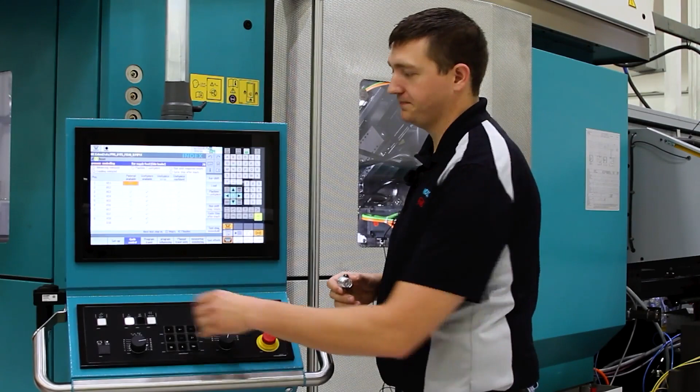So in our first position here, we're going to rough groove the OD of the part, just a 4mm groove tool. This is 6061 aluminum that we're going to be using. So we rough groove the OD, and then we come in with a drill out the ID, just rough it, and then we finish bore the ID of the part with a boring bar.

So in our next position, we're going to finish turn the OD of the part, finish turn the thread major, and then you'll see us come in with a boring bar, and we're going to thread the OD of the part with a boring bar. And then we're going to rough groove the ID of the part with just a 2mm grooving tool.

In our next position coming up here, we're going to use an X and C axis transmit with one of our live tool stations to create some flats. So we can mill any type of contour with this, as long as the tool can come in from the face of the part.

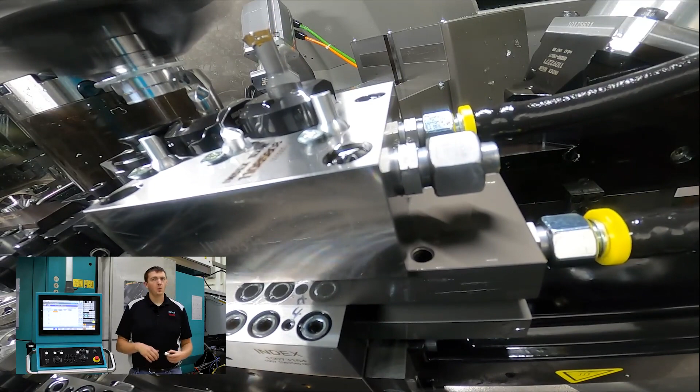We come in, we use our synchron to come in and grab the part, and then we cut off, and then our synchrons allow us to swing to our back working positions. So the benefit of a multi-spindle is we take the parts and move the parts throughout the tools. Instead of like a twin spindle where we move the tools to the part, in this machine we're moving the parts to the tools, which then allows us to separate the amount of time it takes to make a part.

So a part like this, just estimating, would be maybe a minute and a half on a twin spindle machine. On this machine, we're running it right at about 20 seconds or so. So in our last position, we cut off, we bore, we thread. We do have live tool capabilities on the back working.

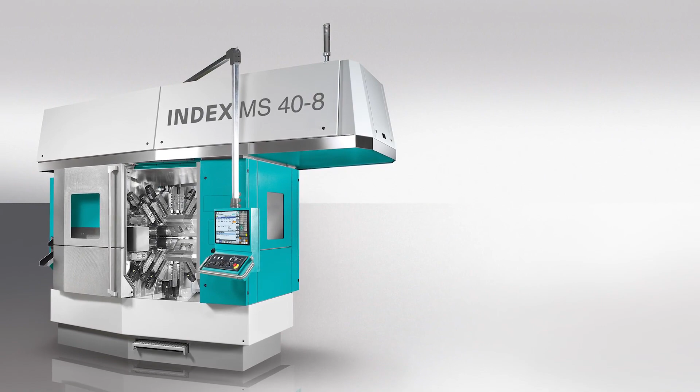You can see the nice wide opening there in the front, easy access. The ideal part for this machine typically is one that can fit in your hand. It's not too long, with a length to diameter ratio of about 3.5 to 1 or less. Decent volumes of lot sizes 5,000 or more are ideal.

If you have live tool work required on your parts, this is a good machine for it. And if you have a part with tight tolerances and lots of callouts, concentricity, it's a part you don't want to be moving from machine to machine. The fact that you can do it in a single setup provides huge benefits.

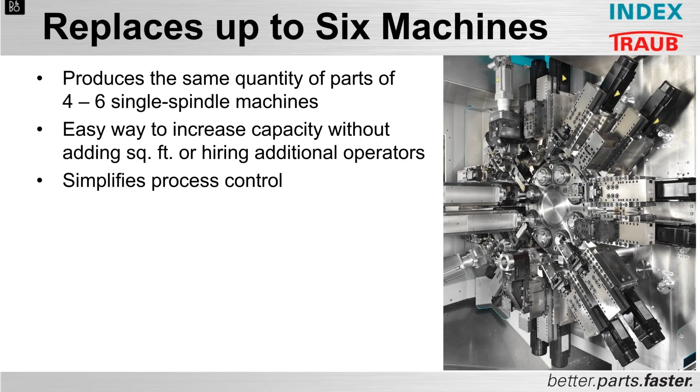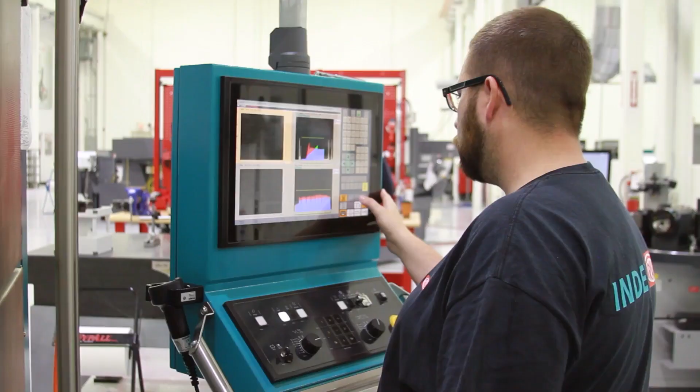The machine is designed to replace up to 6 machines. The capabilities of this machine allow you to make the same production rates typically achieved out of single spindle machines, and quantities of 4 or 6 machines can be matched by a single MS40-8. It's an easy way to increase your capacity without adding square feet to your facility, taking up floor space, or hiring additional operators.

It also simplifies your process control. Very simple to program—in spite of what it looks like, it's actually quite simple. You basically have 8 two-axis machines.

The MS40-8 is also designed, as are most multi-spindles, to give you the lowest cost per part. Dramatic increases in productivity will reduce your per piece shop rate and labor costs by a factor of up to 6 or more. Producing lots on a single machine reduces your costs related to quality, energy, logistics, manpower, programming, and work in process. It's a pretty extensive array of areas where you save a lot of money per part with a multi-spindle.

And despite the higher initial investment, multi-spindles do pay for themselves faster than single spindle machines, usually as a result of just the sheer volume of parts that you're creating off the machine.

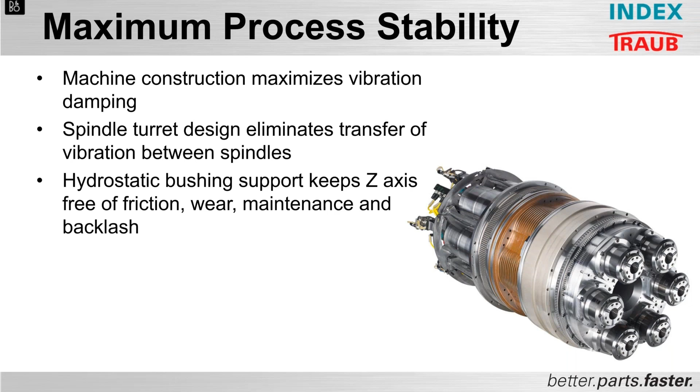Get maximum process stability with the Index multi-spindles. Our machine construction maximizes vibration dampening. We have a spindle turret design that eliminates the transfer of vibration between the spindles. We utilize a 3-piece Hirth coupling, which gives you outstanding accuracy, repeatability, and reliability. We also have hydrostatic bushing supports on our Z-axis to keep them free of friction—no wear, maintenance-free, and zero backlash.

There's a lot of flexibility in how you can set up an MS40-8. We have 16 tool slides that can be configured with X, Y, or Z axes. The Y axis is available on up to 4 slides on the machine at a time. Up to 14 of those positions are available for back working.

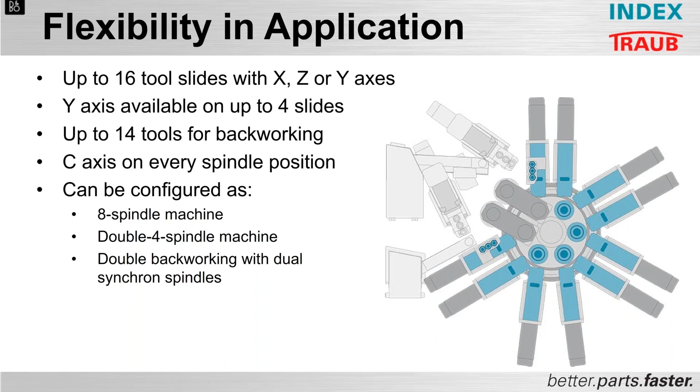Every spindle position has an independently controlled C-axis with 7,000 RPM, and the machine can be configured either as a double 4 machine utilizing 3 front working spindles and 1 rear working spindle, times 2—so you get the productivity of 2 4-spindle machines—or you can use it as a single 8 spindle machine with a single synchronous or synchron spindle for your back working.

The MS40 is the second largest of the multi-spindles in the Index portfolio. By the name of the machine, 40 tells you it's a 40 millimeter through hole with 8 spindles. Each spindle is 7,000 RPM with 24 kilowatts of power—a very powerful machine for its size class—with high torque, 57 Newton meters.

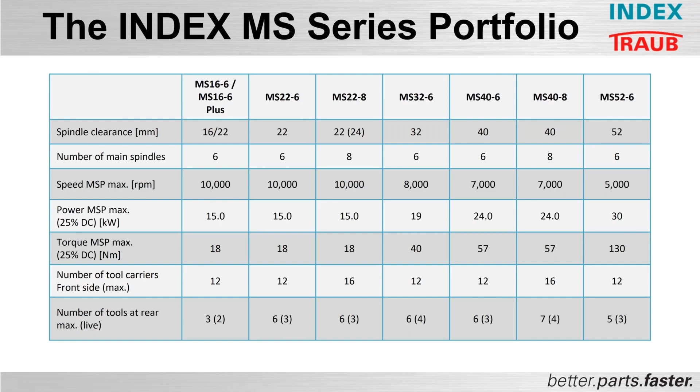Again, 16 tool carriers, and up to 7 tools can be used for rear working. At this time, if there are any questions, we'd be happy to answer them. And thank you for your time.

You can see that the machine is very compact and easy to access. It's very easy to touch the back of the machine, so changing tools or doing anything in here is super easy. You see it's got the main spindle and counter spindle. You have 2 options here, a D65, 65 millimeter or a 90 millimeter. This is the 90 millimeter.

We do have a reduction chuck over here in the counter spindle. And then you have 3 turrets. Turrets 1 and 2 have a real X, Y, and Z axis. Turret 3 has an X axis, and the counter spindle moves for its Z. You can still do tandem operations with turret 2 and turret 3 on the counter spindle. You just sync the lower turret to the counter spindle, and it tracks the counter spindle until you program some relative motion.

You can have VDI 25 tool holders, which would be 14 spots, or you can have VDI 30 tool holders, which this machine has, which is 10 spots per turret. Our VDI tools are pretty awesome. We have the W serration, where it interfaces with the turret, and it makes it super repeatable for taking the tools out and putting them back in between different setups. When you take the tool out and put it back in, you can expect it to repeat within a few microns of where it was originally.

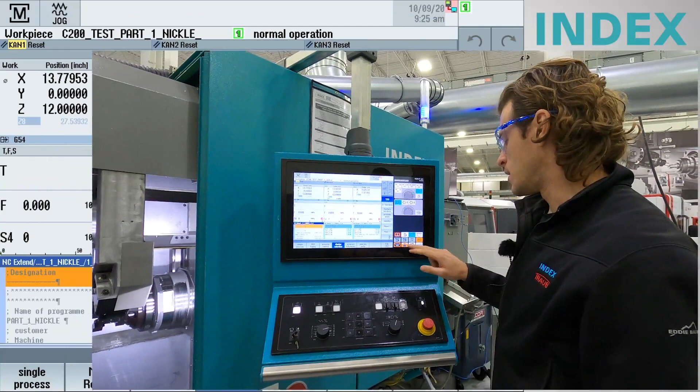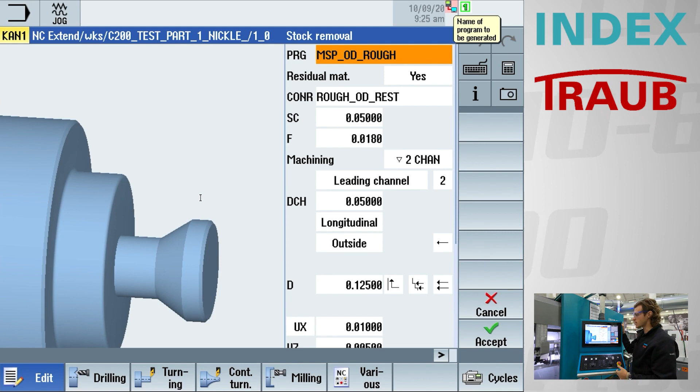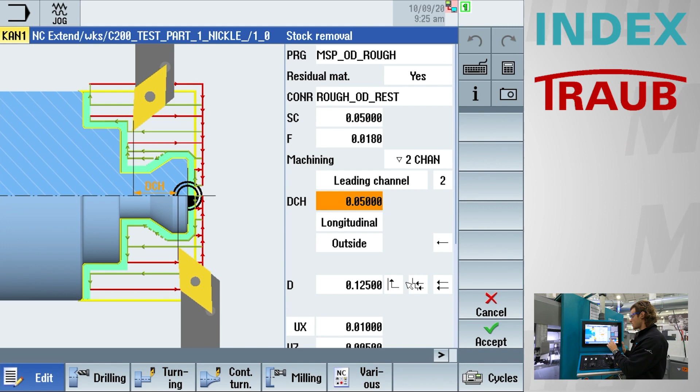I'll jump into the program here real quick. In this rough turning group, I have a rough turning cycle, and if I open it up, as is often the case, you get this cool mask with a graphic on the left and parameters on the right, which influence the cycle. This would be a really easy way for me to change the depth of cut right here at the machine, just by changing one number, not having to reprogram stuff. So yeah, a lot of our cycles have these really helpful masks.

If I go down to the transfer, moving the part from the main to the counter spindle, again, we have this really helpful mask, which tells you exactly what you're inputting and what influence it has.

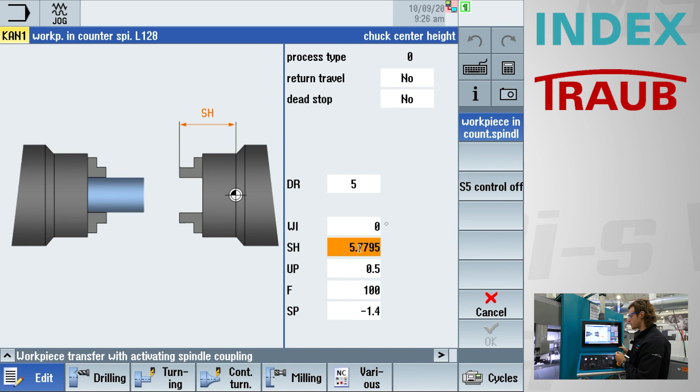Go over to the parameters page. Here you have your tool list and wear corrections. You also can see stuff with your 1_3 file, which is our tool change file. This file makes it super easy to see if you've got the right tools loaded in the machine, or if what you have loaded in the control matches what the program needs. It also makes it really intuitive to do changeovers, kind of walking you through the process of taking tools out and putting new ones in.

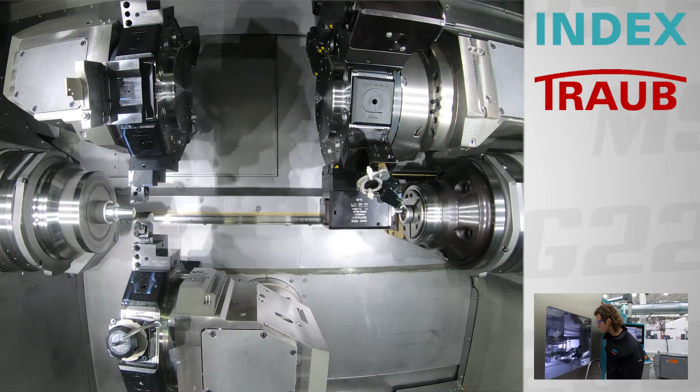I'll go ahead and close the door and run through a part here. So on the main spindle, we're doing some pinch roughing. On the counter spindle, that was a finish or a facing pass, and then we're milling.

On the main spindle now, we'll do some pinch milling. Then on the counter spindle, drilling, a couple different spots. On the main spindle, we're doing a finishing pass right now, and once it gets past the threads, we go ahead and start the threader. Doing some chamfering on the counter spindle, and now some tapping. And I think we're doing a deburr pass on the main spindle while drilling at the same time.

A little chamfer, and then this is just a simulated cutoff since I'm tracing the part. Typically the counter spindle would come forward, grab the part, pull it, and then cut off. So that's a pretty good example of the kind of part that would get run in this machine.

I'll go ahead and turn you over to one of our regional sales managers. Thanks, Kyle. My name is Tim Partridge, and I'm the regional sales manager for the East Coast, and I was just going to walk you through a few other key features of the C200 machine.

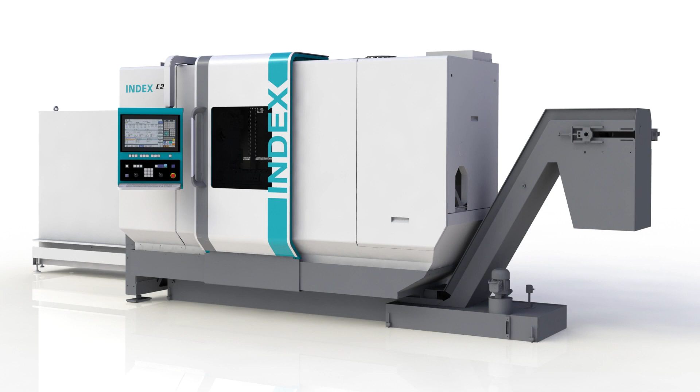Here's a front picture of the C200 machine showing you the limited floor space it takes to house this machine. One of the advantages right off the bat is its small footprint. And of course, the third turret.

The third turret is one of the main features of this machine. It gives an immediate 50% gain in productivity and output over a 2-turret machine. Increased tool capacity allows processing of more complex parts, so you can have up to 14 tools per station, meaning you can hang on to tools between setups and have resident tools that you typically use already located inside the machine.

The third turret's ability to serve either spindle allows it to efficiently produce parts requiring disproportionate front or back working. So when you're having a problem balancing the machining process, and you have more work at one spindle than the other, you can use that third turret to bounce back and forth between spindles, which helps cut down on those features and reduce cycle time.

Identical dual spindles - this is one of the keys to a lot of the Index products, especially the C200 machine. You have identical main and counter spindles, which allow maximum flexibility in part processing. When you have two spindles that are alike, you never have to think about a weaker spindle when programming your part and coming up with a machining strategy that gives you the optimum cycle time. High precision and liquid cooled spindles.

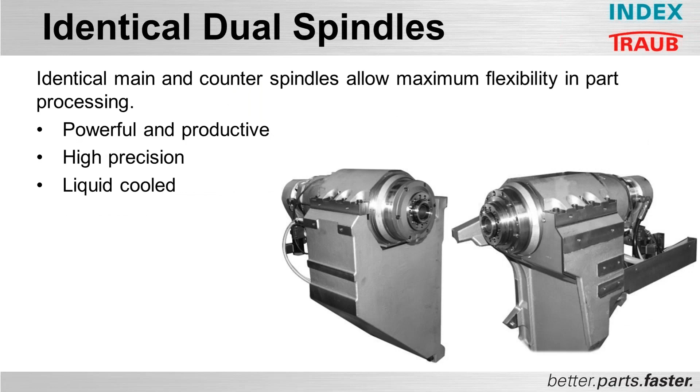Index single slide system, another one of the dynamic features of the C machine. This slide shows a close-up of the scissors mechanism that controls the X and Z axis per turret. The unique Index guide system provides kinematics that ensure significantly faster dynamic response because of less movement and fewer moving parts, maintaining stiffness, vibration dampening, and accuracy, and it also helps eliminate potential effects of thermal growth.

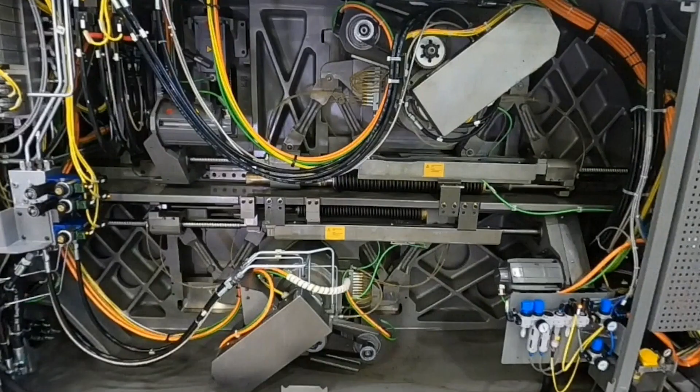Here's a broader view of the kinematics per turret. You can see the scissors mechanism being driven by a screw that controls the X and Z axis of the spindle. This is a picture of the back of the machine - it's very open. Once you see the back of the machine, you know what I'm talking about - very few moving parts to generate the X and Z movements that we need.

Flexibility - the machine design enables pinch turning, pinch milling, dual process drilling, and flexible part support options. This pinch turning and pinch milling and all these different processes are not only a reduction in cycle time, but they can really balance out the process, and they can produce a more stable cut as well.

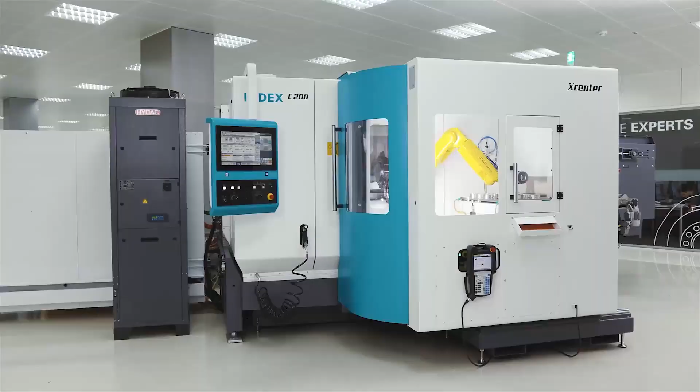Integrated automation - the Xcenter robot cell offers simple turnkey automation. This is a new design for us that recently came out, with a space-saving design - as you can see, the floor space is still small even with this unit on here. It's completely integrated with the machine, accommodating secondary processes such as cleaning, deburring, etc., and enables unmanned operation with no interruptions from part loading or unloading.

This is capable of most post-processing operations that you want to do inside or outside the machine, such as part inspection or part stacking. Thank you very much for your time, and now we'll open the floor for questions and answers.

Okay, thank you, Kyle and Tim. We're going to try the Q&A again. So if someone wants to field the previous question, when we were looking at the MS-48, the question we had was how long it would take to set the machine up for parts such as the one that was demonstrated.

This is Daniel Kesting speaking. Can you hear me? Yes, thank you, Daniel. Okay, so this is based on the experience of the operators and also the situation of the setup right now. If the machine is, I would call it naked - so nothing is mounted, no tools, nothing, we start from scratch - it's about, with the bar loader, about a half day putting the tools in the machine.

Hello, my name is Mike Nickel. I'm an applications engineer with Index Traub. I'm standing here beside the G200.2 mill turn machine by Index. I'm going to go over a few of the features that this machine has, and then we have a test part we're going to run through, and I'll explain the operations as they go.

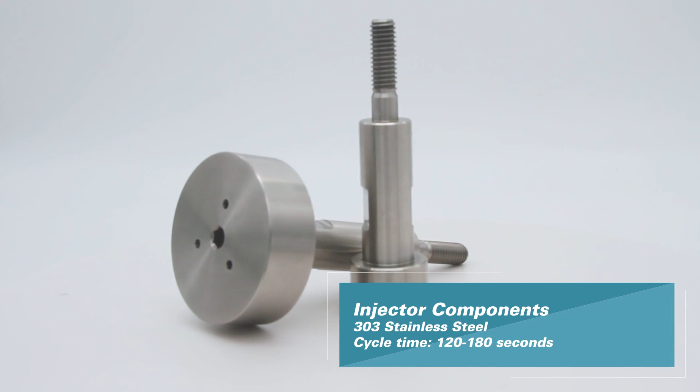On this particular test part, we've broken up some of the operations to give you a better emphasis on what's going on. Typically, when we engineer a turnkey solution for a customer, we strive for 3 tools in the cut as much as possible. That way we can give you the most efficient process possible.

Now I'm going to explain some of the features of the machine. This particular machine has 3 tool turrets and a milling spindle built into this turret. Each one of the turrets has 14 tool locations with a VDI tool interface. The milling spindle has an HSK tool interface, and is capable of 6 different tools. Each one of the turrets has a capability of 14 tools.

All the tooling positions on the turrets are capable of being driven up to 7,200 RPMs. The milling spindle is also capable of 7,200 RPMs. The main and counter spindle are identical spindles, capable of up to 6,000 RPM. This machine is capable of running up to 65 millimeter bar stock.

It also features a gantry arm. The gantry arm would come in and grab a finished part out of the counter spindle, pull it out and deposit it on the conveyor belt to carry it outside the machine. When you get down to the end of your bar, the gantry can also come in and grab your remnant out of the main spindle and pull that remnant and deposit it on the conveyor as well, so that while that's happening, the bar feeder can go ahead and load another bar and keep your process right on rolling.

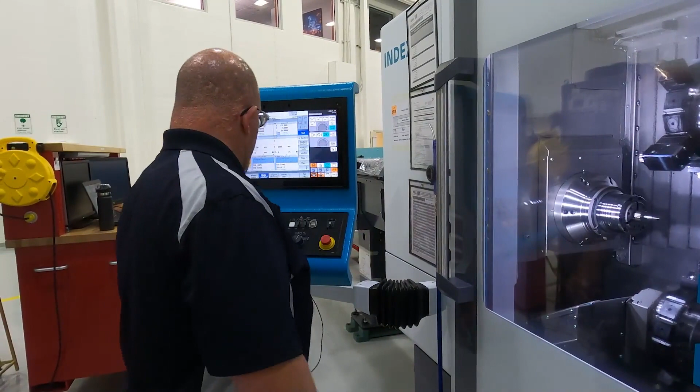We start out on channel 1. We come in and do a face pass, get your bar stock cleaned up and sized, and then we'll do some pinch roughing and turning, some finish turning, some threading, some pinch milling. On the counter spindle, we're doing some work to create a 4mm hex and then finish turning on it.

Right now on our main spindle, channel 1 and channel 2 are synced up, doing a pinch turning operation. What this does is allows you to cut that roughing time in half, because channel 1 and 2 are both roughing at different diameters at the same time, but they're synced up. This machine gives you the ability to do that because when you sync up the axes, the tools have about 30 thousandths distance between each other, so they're not running into the stock.

On channel 1, it has a full 360-degree articulation on the B axis, so you can take that turret and put it anywhere you need as far as your geometry requirements. Right now, it's taken the axial live tool at 20 degrees into the part. It can do this with any of the tools on the turret or the milling spindle, and it can do it on the main spindle or the counter spindle.

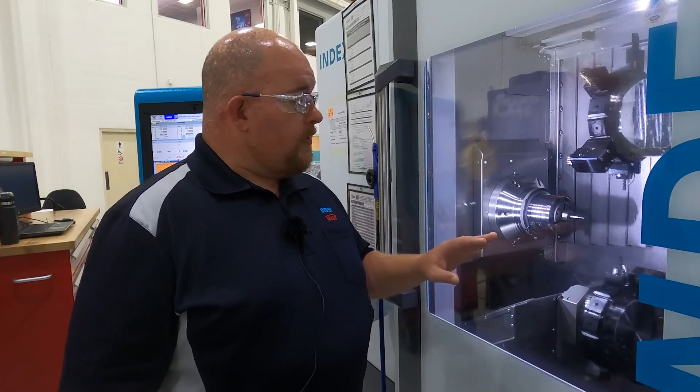These machines are incredibly robust, rigid and accurate, and all the tool data for your geometry is stored in a unique file. That way when you go to do another setup or you tear the machine down, and if you don't pull out your perishable tooling from your tool holders, you leave it how it was, and you pull the tools out, with the W serrations, it allows you to put those tools back in exactly where they were with incredible repeatability.

So with all the geometry data and the offsets saved in a unique file in the program, when you reload the program and reset up the tools, you are literally ready to go and run those parts exactly how they were running the last time. Saves a great deal of time on setups and efficiency.

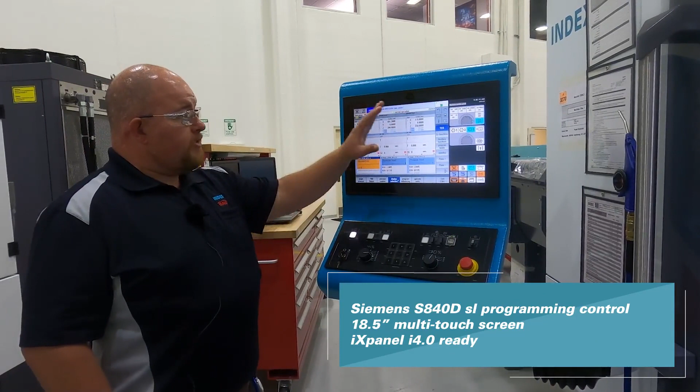This machine also has a Siemens-based control specifically designed for Index. It utilizes a touchscreen monitor and some hard keys. Very user-friendly. From right here, you can do all your typical operations as far as manual control of the machine or operating your program.

Right here would be our program screen. And if you notice at the top, your messages come up here telling you to open the door because we ran it through a cycle. So we go ahead and open the door up and you'll notice the message goes away.

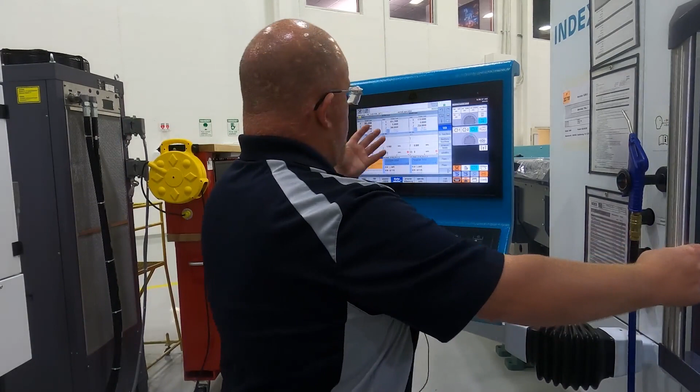To do any manual functions on the machine, we have a safety protocol built in. So if you go here, it allows you to put the machine in jog mode, and then you select turret 1, 2, or 3, or the sub spindle, or the gantry. What we're going to do is select turret 1. We're in jog mode. With the door open, it will not allow you to move any function of the machine without using the confirmation key.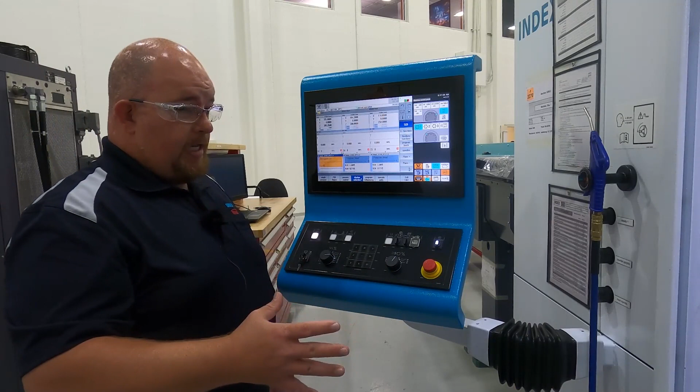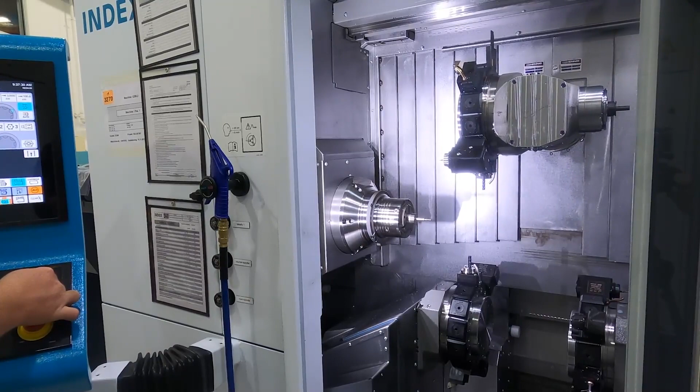When you turn the confirmation key on, the axes that will be available to you will light up. This is to have both hands on the control to make sure that you don't have any hands in as an operator for safety. So without the confirmation key turned, no axes will move with the door open.

Now with the door closed, you can jog everything around like you would normally. This is another safety feature built into our Index machines. Once the door is closed, it automatically locks until you use the guard key to unlock the door.

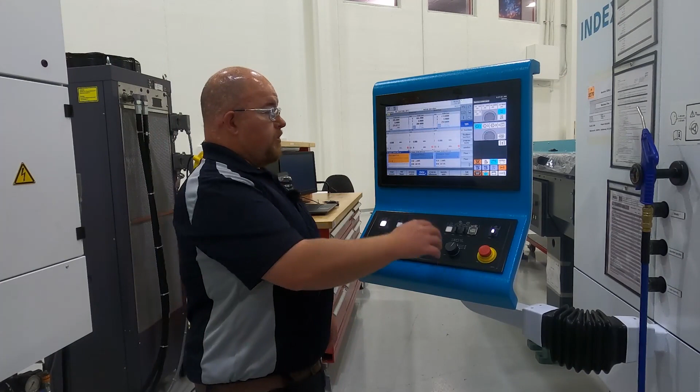Some more features of this machine: you can go into your normal screen, and then you have program influencing. On this page, you could adjust the percentage of the rapid traverse rate.

So if you're doing a setup and you want to single block through, check it out, make sure everything's all right. You can manipulate the feed rates.

Another feature of the Index machines is you have multiple block skip levels. So if you want to do a family of parts and turn on or off features, you can program it that way, essentially using the same program to run different parts within the same part family. It's as easy as checking or unchecking some of these boxes. This is totally user set as far as the programming goes.

From the operate unit screen, you can manually operate any of the functions of the machine. Here we have the tool carrier file open, so this would be your turret 1, 2, and 3. We can manipulate the gantry, turn the spindles on, anything like that from right here.

Your process control screen shows you what program you have loaded in and your previous cycle time.

MDI, you can set it up and do any of your manual data input stuff that you may need for setup or testing. Single process is kind of the same thing. You put in your own code and then just run it through once for testing sake.

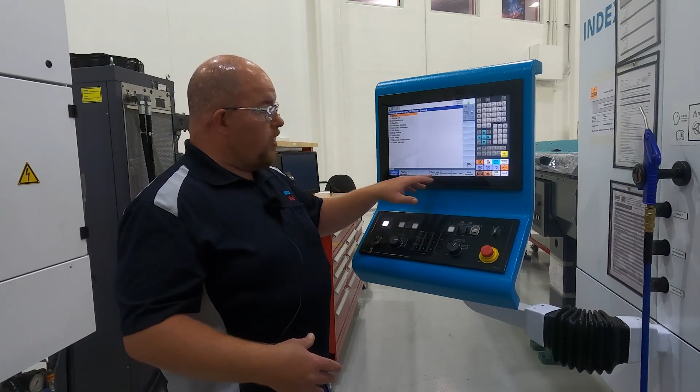From here you also go to the other parameters of the machine, anything to do with your work offsets, tool change positions, speed limitations, anything like that. It's all controlled from right here. And this is where you would also load your tool data file, which would be your 1 to 3.

And then it's really easy to get back to where you were. You just go back to machine, go to display selection, and your program's right there. These are different displays on your program screen, in case there's something in particular you wanted to look at.

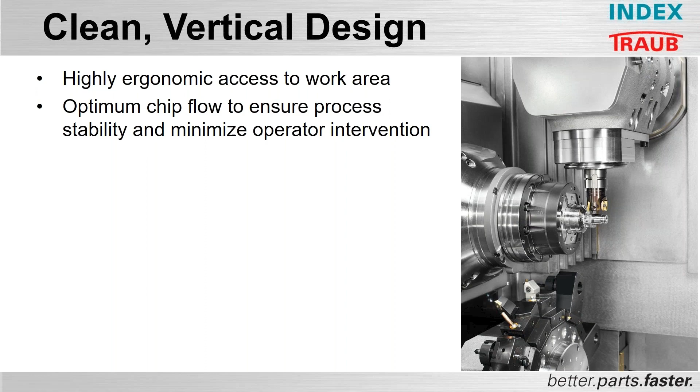Also, with regards to this design, there's optimum chip flow. There are very few places for chips to go ahead and collect, as you would find on a typical slant bed type mill turn. So phenomenal chip flow, minimizing operator intervention. Of course, operator intervention on a cycle does nothing but slow down production.

The machine is designed with great loading and unloading capabilities. The footprint is small for the floor space required, but it's also a very large working envelope. You have approximately 660 millimeters between centers, equating to roughly 25, 26 inches. It gives a lot of flexibility on the machine.

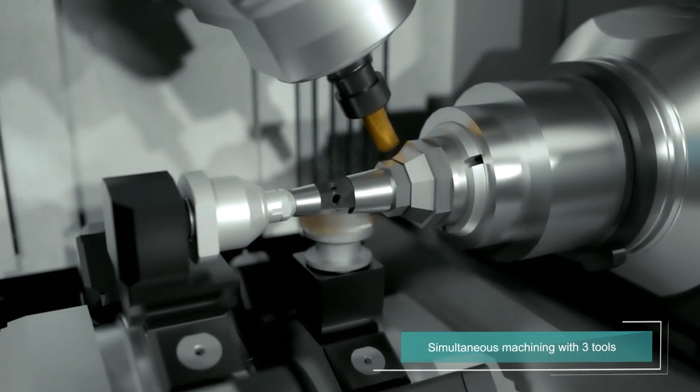This is the ultimate in a turn mill machine for flexibility in what you can do. I always emphasize very strongly the W serration of our turrets. Considering this machine has 3 turrets on it, the W serration is extremely important to have a thorough understanding of why we do this and where the benefits really come in.

The VDI tooling is extremely fast change, but everybody cringes at VDI tool holders because they are not very accurate. So what we do is have the W serration ground into the outer circumference of the turret. As you can see in that center illustration, it's convex.

The tool holders that we build, and we do license some others to build, have the ground mating surface on a convex area, giving us 8 mating surfaces for positioning of the tool holder. Not only is it outstanding for positioning, but it also creates 8 mating surfaces for very strong and very stable tools.

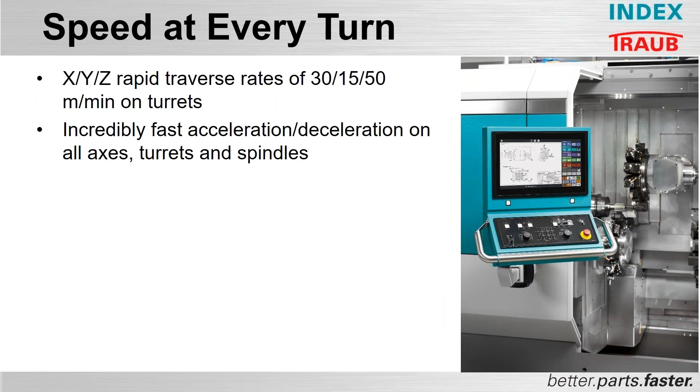The speed of the machine is very important. Rapid traverse rates for X, Y, and Z, acceleration, deceleration from your main and counter spindles - all of these equate to cycle time. And this is really important when it comes to profitability on the machine. Doesn't matter if you're making 10 pieces or 10 million pieces, your cycle time is essential to the profitability of the machine.

With Index's extremely high rapid traverse rates and extremely fast acceleration and deceleration of the different axes and the spindles, you're able to have that non-machining time cut down to a minimum.

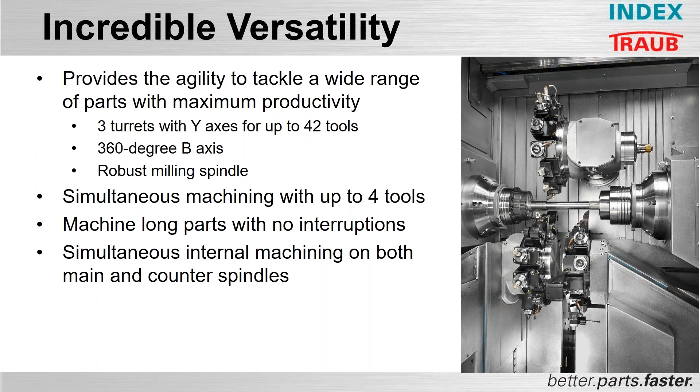The versatility of the machine: 3 turrets, a milling spindle, large workpiece capacity, the ability to have 3 and 4, potential of 4 tools in cut simultaneously. All of these equate to profitability.

You have 42 tools on the turrets, plus an additional 6 tools in the tool changer, so a total of 48 tools you can have in this machine. Quick changeover, very, very strong, extremely accurate. But the fact that we can have the versatility of multiple tools in cut really, really improves your profitability on your parts.

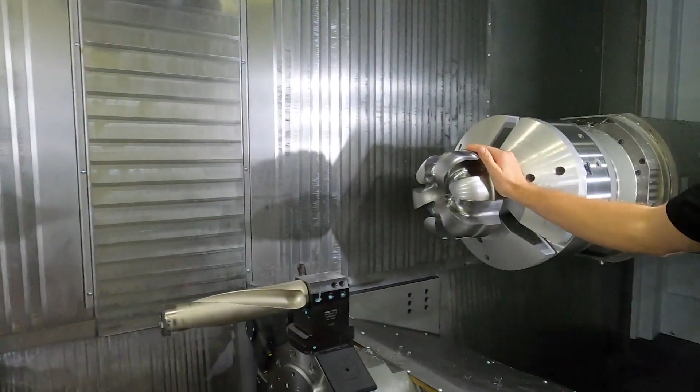What I've got in here right now is kind of an energy sector part. It's like an oil field drill bit. Over on the main spindle side, I've roughed it out, finished, turned it, put some API threads on it, ran this big drill, some boring, and then I'm doing feed milling here for some slots and to rough out these pockets before transferring it over to the counter spindle, where I'm doing more milling. I'll put some insert pockets in here and some mud holes.

Before calling it finished, something that's really cool about this part is I've got 3 end mills running at once. So an end mill in the main spindle, roughing those pockets out and doing the flat, and then a couple end mills here working together to rough out and then semi-finish this part. So compared to a machining center with a single tool carrier, I'm getting like 3 times the material removal rate, on top of being able to do the turning in here, one machine process.

As far as getting the parts in and out, we have a couple options. One is the iX Center, which is like our in-house automation solution, with a robotic arm that can do like 250 kilogram parts, something like that. We also have a lighter duty work handling unit, which can come in kind of like a gantry. You can load parts, slugs, or get finished parts out. And that's got a limit of 25 kilograms.

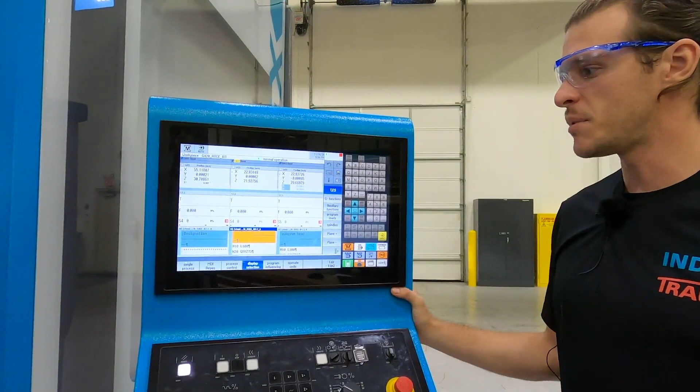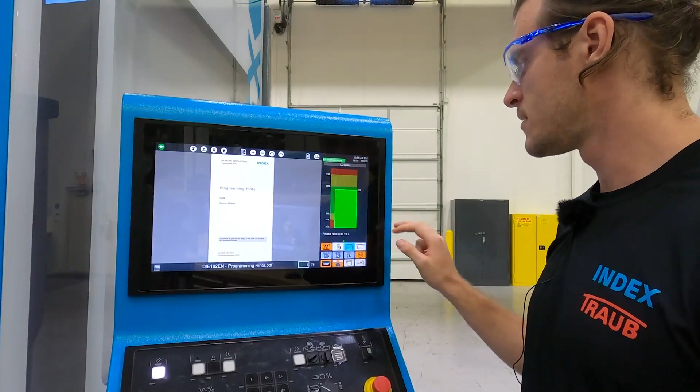And then the control on this machine is a Siemens solution line, which maybe you've already seen a bit of today. It's sleek, it's powerful. It's got Industry 4.0, some cool stuff like our manuals, so you have all your manuals here on the control. Of course, you can put your part prints, your tool lists. I like to use my 4.0 panel to check my coolant levels, my fluid levels.

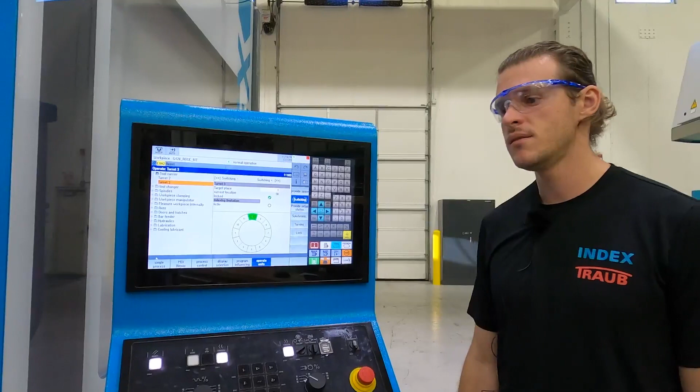And then, of course, we've got our normal readouts for while we're running the machine, for operating different parts of the machine. We've got our tool management, which is pretty powerful, and program manager. So yeah, that's the G420. It's a great machine for large and complex parts. So with that, I'll hand it back to our sales team. Thanks.

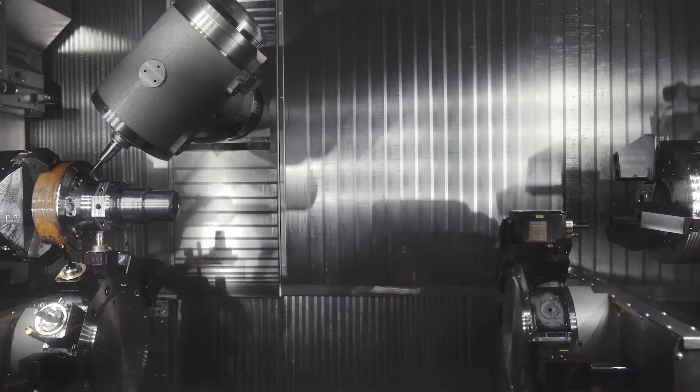The flexibility of the machine - we have 2 lower turrets, just to expand on this, both with Y-axis and every station live. Put that together with the motorized milling spindle and the tool capacity of 115 tools, gives you a total of 139 tools available with this machine, and every one of them can be live.

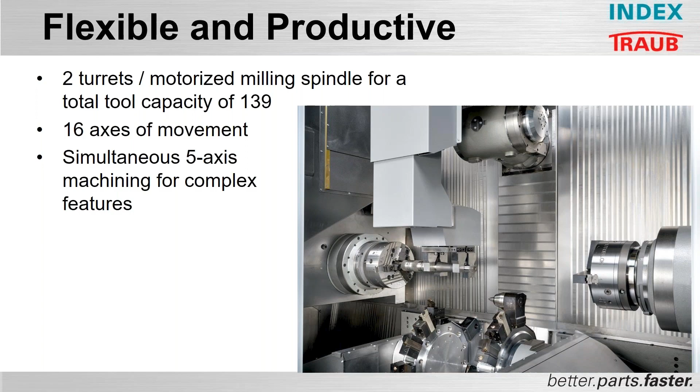16-axis, 2 3-axis turrets, XYZB motorized milling spindle, 2 C-axis, and additional on the counter spindle. With the motorized milling spindle, this does allow for simultaneous 5-axis machining too. So it's not just a 3+2, 4+1 - you can do full 5-axis machining with this machine.

Thermally controlled - we thermally control the main, the counter spindle, the motorized milling spindle, and the electric cabinet. In other words, we're using a liquid-cooled system in order to maintain temperature on these. It's a way to reduce heat and just stabilize the machine throughout the entire working day. It gives you that ability to maintain tolerance on your parts.

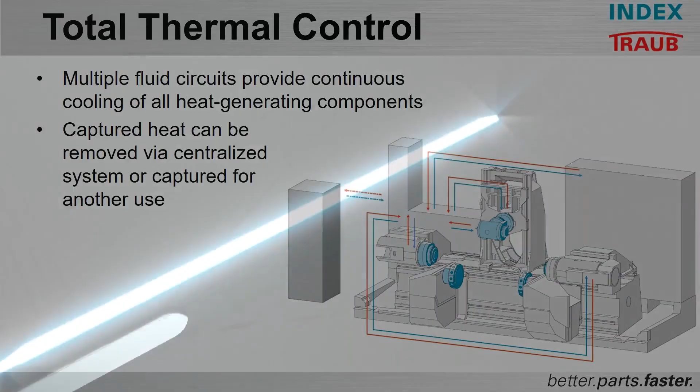G420, as with all of our machines, is Industry 4.0 ready. The touchscreen control is designed for ease of operation, with a lot of flexibility in what you can do with the machine.

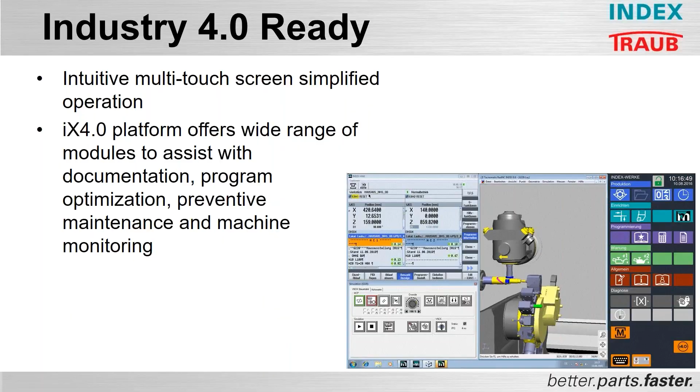The iX4.0 platform is a wide range of modules. This allows machine monitoring offline, giving you the ability for preventive maintenance monitoring, program optimization, and all your documentation such as drawings, setup sheets, maintenance manuals, operation manuals, and parts manuals. Everything is right in the control.

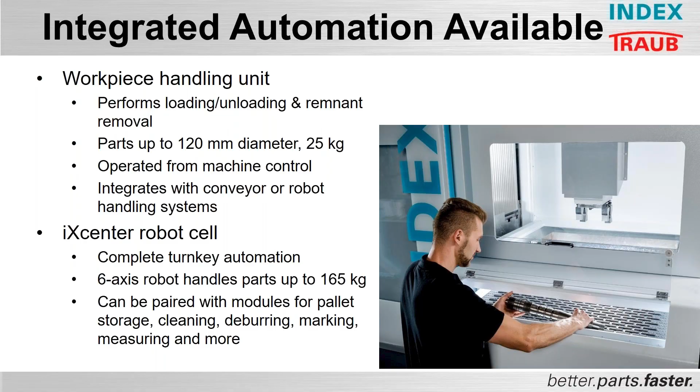Integrated automation. There's a couple of different things we can do, as you saw in that initial photograph of the machine, the workpiece handling unit. This can handle parts up to 120 millimeters, about 4 5/8 inches in diameter, and about 50 to 55 pounds. This is operated from the machine control and utilized for either loading, unloading, or both.

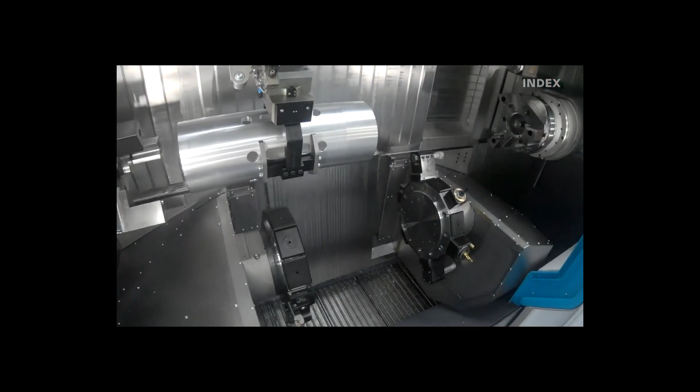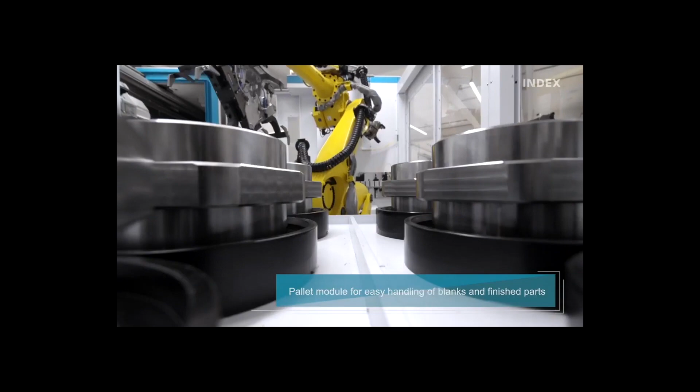We also offer an iXcenter robot cell, as we do on many of our other machines. The iXcenter has a robot built right into the machine. Basically, this gives you the ability to load and unload, and pair it together with pallet storage, cleaning, deburring, marking of parts, checking with measuring via a coordinate measuring machine, and stacking parts. A very flexible unit right on the front side of the machine. It also handles substantially greater part weight than the workpiece handling unit, up to 165 kilograms, close to 350 pounds. Very flexible for your machine.

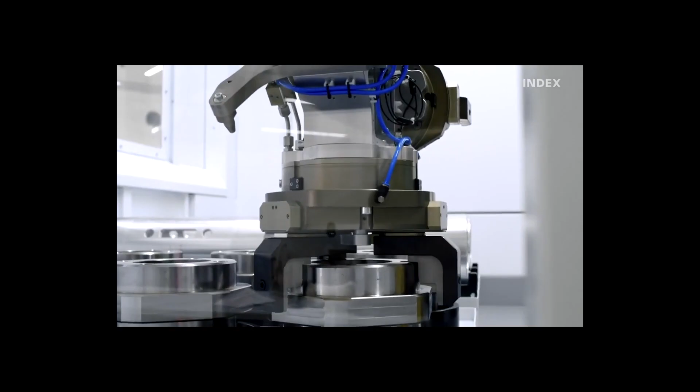That's just a brief overview of some of the things about the machine. Happy to answer any questions you have. Kyle is on board here with us to answer any questions.

Okay, thank you Kyle and Ed. Looks like we had two questions come in during the video. Early on, somebody asked what the cycle time would be for the drill bit that Kyle showed. About 3 hours.

Okay, very good. This looks like a more general question - somebody saying all of the Index machines they've seen are for smaller parts, and asking if this machine is an exception or a new direction. I would say it's a direction of enhancing our product line. Index has always been in the G300, G400 series type range. This is just expanding on that previous platform. We are growing into larger machines too now with a G520, which is a little bit bigger. It's just an expansion of our product line.

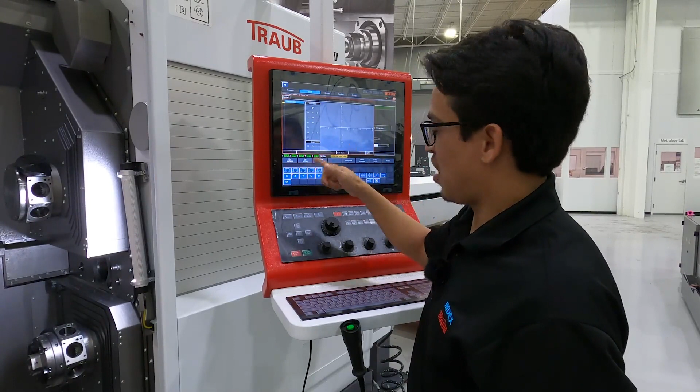What you could also do is, if you have a family of parts and a certain feature is the same for each part, you could save that 2D wireframe, go ahead and grab it, and pull it up. Now we have that contour already saved on there, and it's pretty much ready to go.

We also have a 2D or 3D simulation. So I want to save that. This is a really accurate way for a setup guy, when he makes an edit on the program, to go ahead and double check it to make sure what he did is correct. So it's got a nice 3D simulation of the part you are currently running.

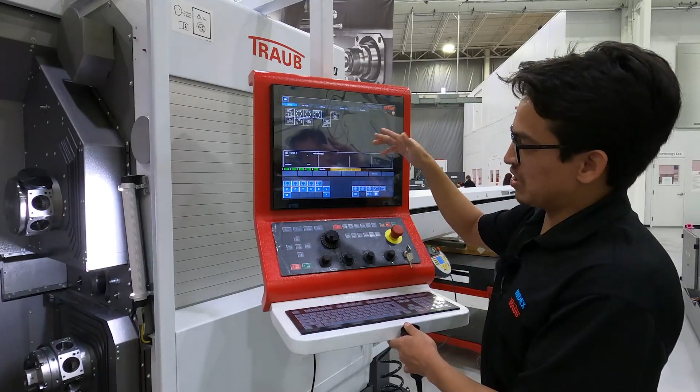Also, another nice feature is that you don't have to stop the machine, grab a wrench, and bring the main spindle all the way back. What you could actually do on this machine is we have a programmable guide bushing option, where you can just go here, guide bush, and adjust it outside of the machine. So that's a really nice feature, makes it a lot quicker for the setup guy or the programmer, wherever it may be.

So those are just some of the features of the TNL20-11. If you have any more questions, I'm going to turn it over to our regional sales manager for more information. Thank you.

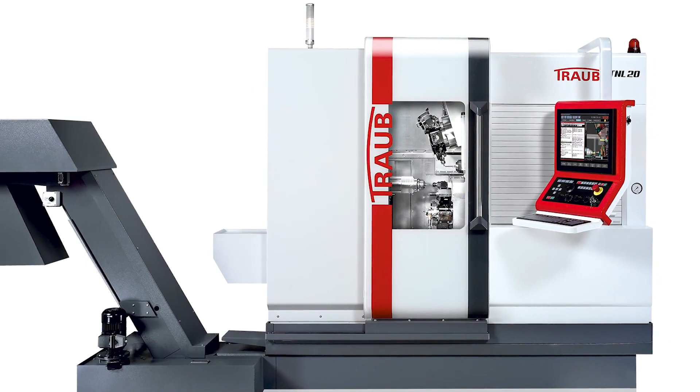Thank you, Gonzalo. I'm Craig Foster, Regional Sales Manager with Index. I'm going to be walking you through a more detailed overview of the TNL20. The TNL20 is a more dynamic Swiss platform designed to shorten your cycle times, and here are some highlights.

Large machining envelope for greater part flexibility, easy changeover between sliding and fixed headstock operation, simultaneous machining with 2, 3, or 4 tools depending on the machine configuration, highest precision due to thermally stable, symmetrical machine structure, turret indexing by NC rotary axes, and innovative part handling options.

The TNL20 has up to 11 axes for faster part processing, unique thermally stable and vertically integrated casting design, and reduced setup times by placing all the tooling and spindles within easy reach of the operator.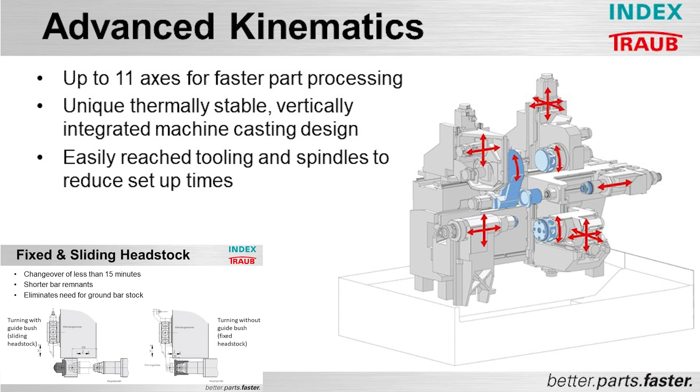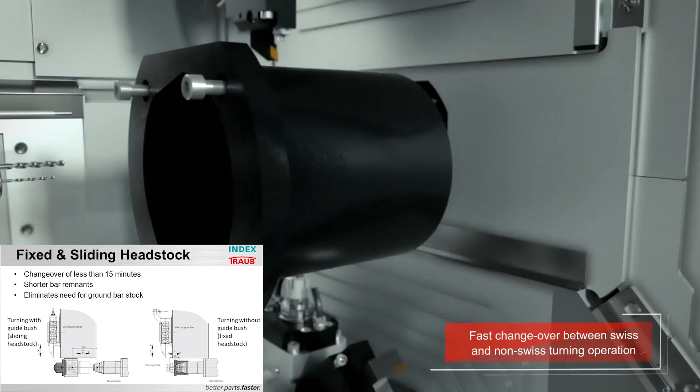Changeover between a sliding headstock and a fixed headstock machine takes shorter than 15 minutes. The benefits of this are a shorter bar remnant and eliminates the need for ground stock.

Both spindles in the TNL20 are fluid-cooled integral spindles, increasing the machine's level of utilization by not having to reduce cutting data on a sub-spindle. Main and counter spindles are identical in construction, same kilowatt size and torque ratings.

The turret basic structure. The TNL20's unique twin X, Y, Z, and H axis turret design can hold up to 24 tools per turret. The chip-to-chip indexing time is 0.3 seconds. Tool drives at each station decrease the setup times.

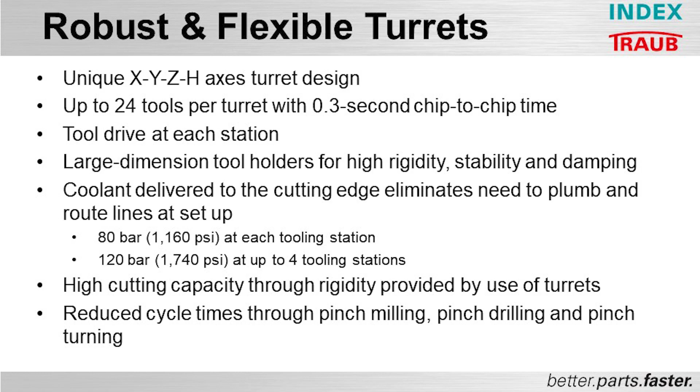Large dimension tool holders, 45 millimeters in diameter, ensure high rigidity, stability, and dampening to increase tool life. Optimum coolant supply directly to the cutting edge further decreases your setup times by eliminating the need to plumb and route lines for each setup.

We have 80 bar at each tooling station and up to 120 bar at 4 tooling stations. High cutting capacity for both turning and milling due to greater rigidity in the use of turrets, and reduced part processing time by the use of pinch milling, pinch drilling, and pinch turning.

The TNL20's unique twin turret design allows large tooling capacity compared to a linear tool carrier. The H-axis unwraps into a linear Y-axis with a remarkable 1,225 millimeters of wide travel. With 2 turrets and up to 400 millimeters of front and back working, the TNL20 presents a total of over 3 full meters of tooling resident in the machine.

Turret indexing is in an H-axis and mechanical interlock is not required, reducing setup time by the use of a hand wheel to set your tooling position and save to the control. This is superior to any linear or gang-style tool carrier.

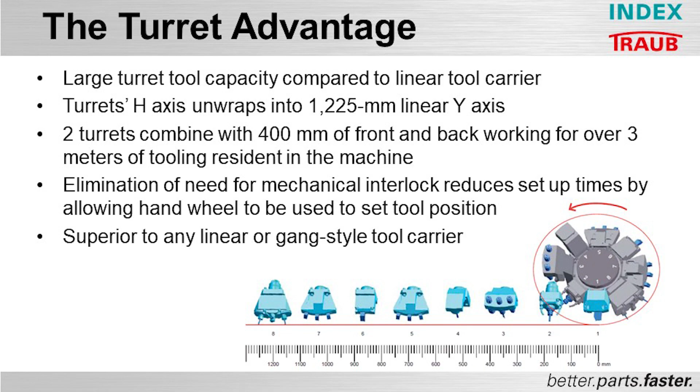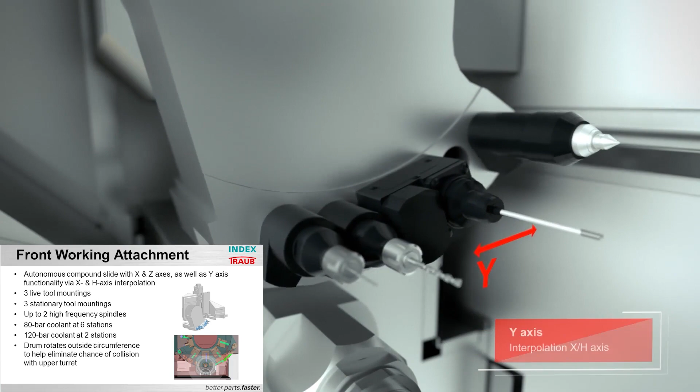The front working attachment basic structure: the autonomous compound slide with X and Z axes, as well as Y axes function by X and H axes interpolation. 3 live tool mountings, 3 stationary tool mountings, up to 2 high-frequency spindles can be utilized on this drum, and coolant pressures of up to 80 bar at all 6 stations or up to 120 bar at 2 stations. The drum rotates in a circumference outside of the upper turret, eliminating the chance of collision with the upper turret.

The back working attachment's basic structure is 4 tool mountings for ID and OD machining. We have coolant pressures of up to 80 bar on all stations, and up to 120 bar on 2 stations.

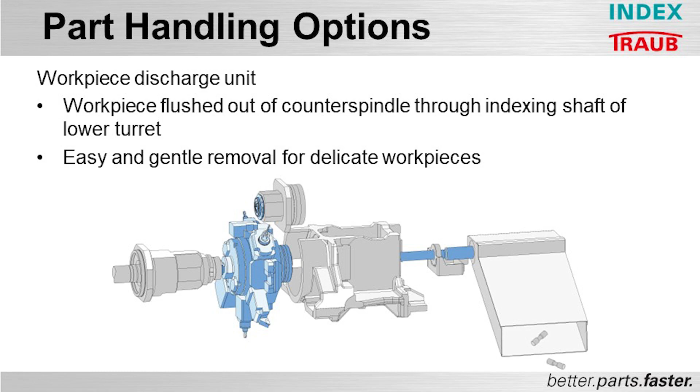The workpiece discharge is utilized with a flushing unit through the bottom turret. Workpieces are flushed out from the counter spindle through the indexing shaft of the lower turret by means of an optional flushing unit. This allows for easy and gentle workpiece discharge of odd profiles that can't be marred up. Flushing through the counter spindle allows removal of long, cylindrical, and rolling workpieces through the counter spindle. This is for shafts and longer workpieces.

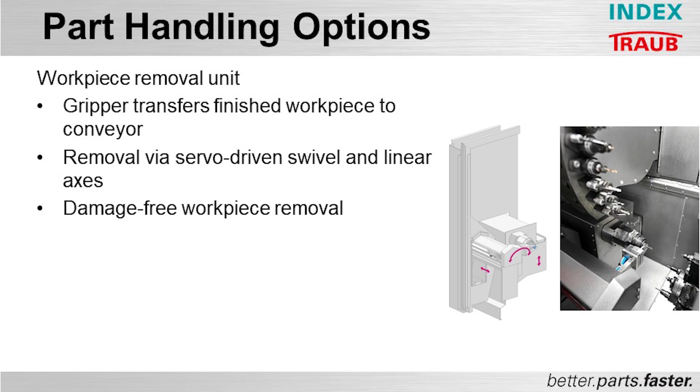The workpiece removal unit removes the finished workpieces with a workpiece gripper and then places them on a part removal conveyor. Removal is via a servo swivel and a servo linear axis in the Z direction, once again allowing for damage-free workpiece removal.

We also have the unique robot cell, or iX Center: intelligent automation, even more flexibility and efficiency. Blanks and/or finished parts can be supplied and discharged quickly, safely, and flexibly, with excellent ergonomics. The iX Center is an integrated part of the machine, so there's no separate installation and setup, no additional safety equipment. The space above the vertical storage can easily be used for subsequent operations such as cleaning, measuring, and deburring. Once again, the iX Center can be slid completely out of the way when not in use.

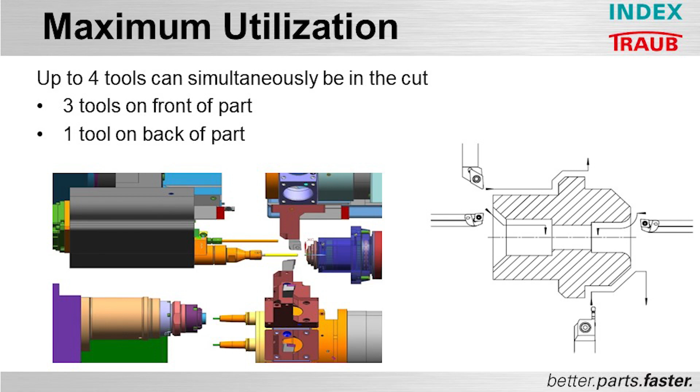Lastly, the reduced cycle times, as we mentioned, of up to 4 tools in the cut. We have 4 tools at the same time, simultaneously, yet fully independent: 3 tools on the front side, 1 tool on the back side. That's a quick review of the TNL20.